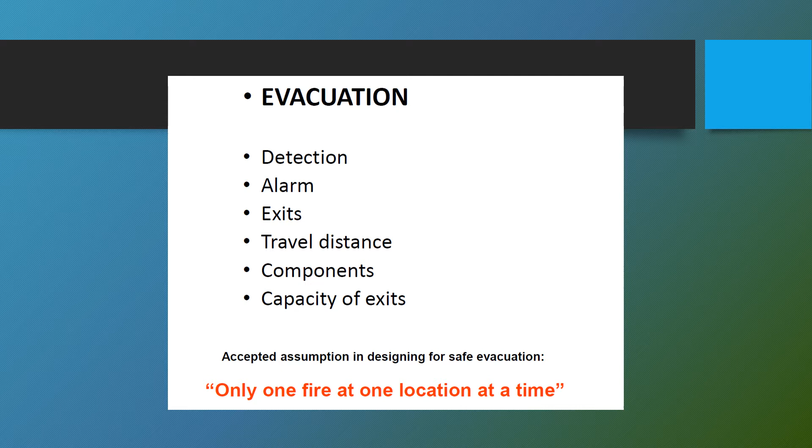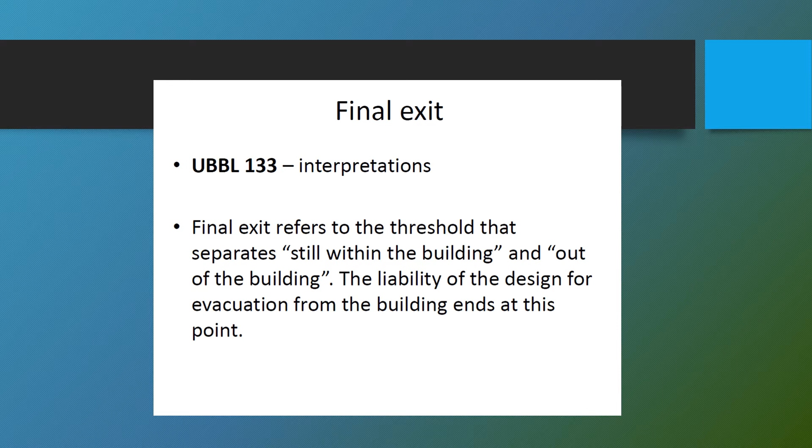About the final exit, according to UBBL 133 interpretation, final exit refers to the threshold that separates still within the building and out of the building. The liability of the design for the evacuation from the building ends at this point.

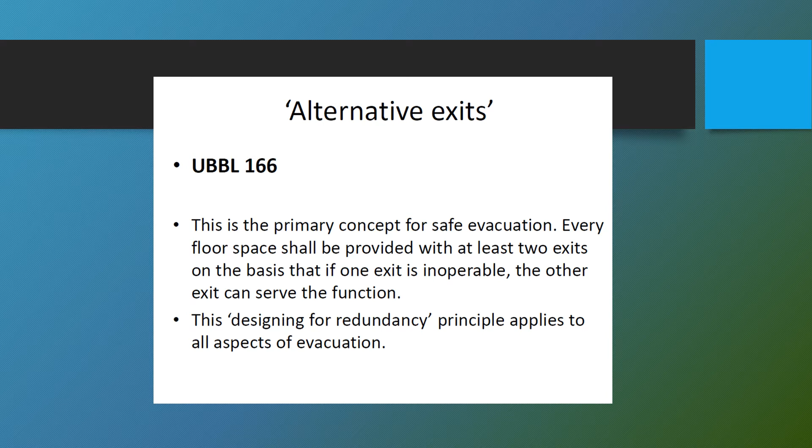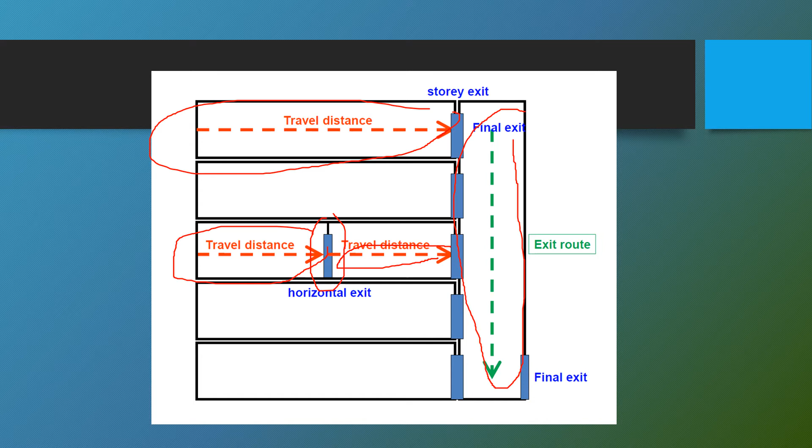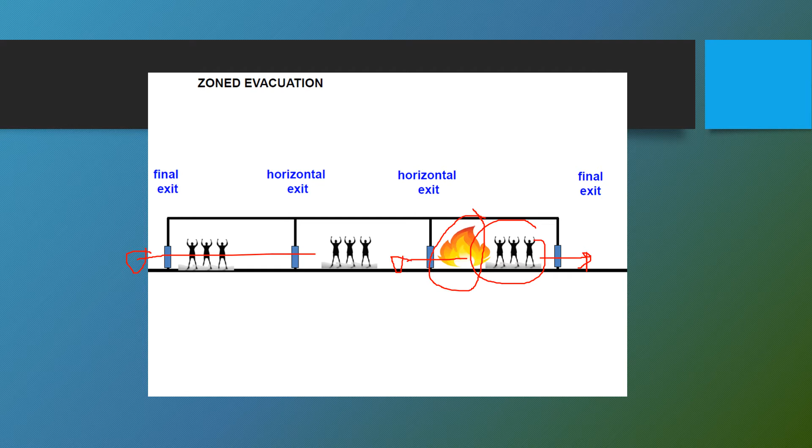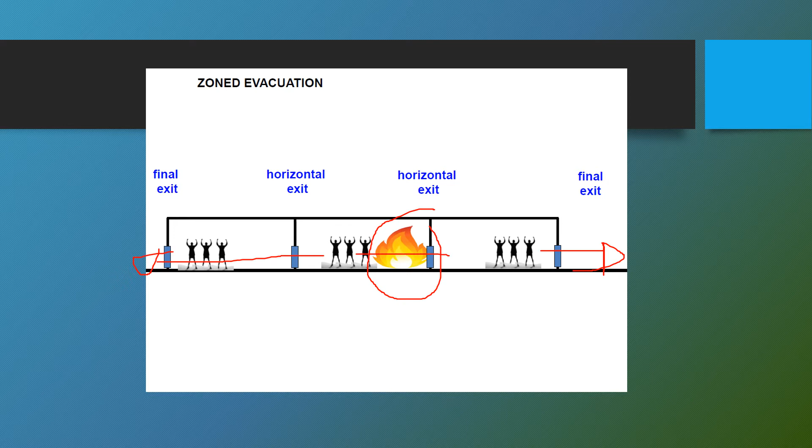Evacuation lift, UBBL 2016 34A. Any building shall be provided with access enabling disabled persons to get into and out of the building, in compliance with Malaysian Standard MS 1183 and MS 1184. This is about the disabled person. Malaysian Standard 1184:2015.

Clause 156: all new building lifts should comply with the statutory requirement on fire requirement of evacuation. That is the mandatory requirement. And then Malaysian Standard 1183:2015 Annex G is the recommendation for the refuge and evacuation lift, here.

Evacuation lift is a designated evacuation lift. The designated evacuation lift shall be within the protected shaft, shall be a component within the protected exit route. It must be there. Shall be able to be switched to evacuation mode by an authorized person at the firefighting access level. Preferably for everyday use by lift, and the physical and functional requirement is similar to a fireman's lift. Must be roughly the same as a fireman's lift.

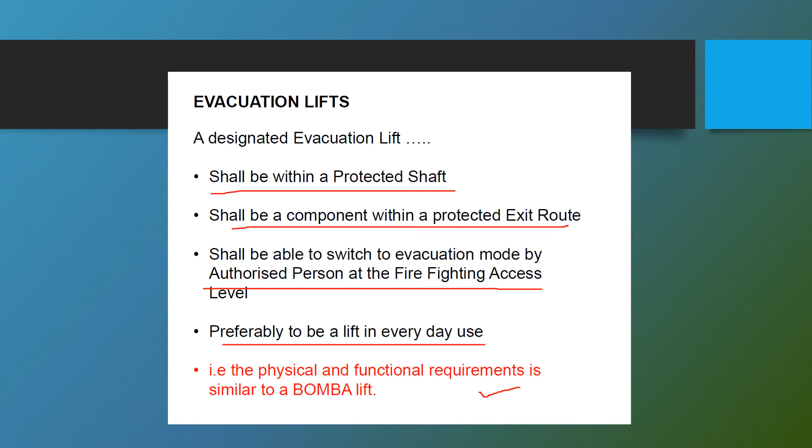Okay, so the travel distance. Let's go through the travel distance. What is called travel distance refers to UBBL clause 167 and 165, Seventh Schedule. It is about the dead end.

There's dead end, there's direct distance, there's open plan. What is called dead end is the initial travel distance before the point where alternative paths become available. And then direct distance is about stipulating that travel distance must be measured along the actual path of travel. And for the open plan, where the actual path of travel cannot be determined, the direct distance can be measured as a straight line to the exits.

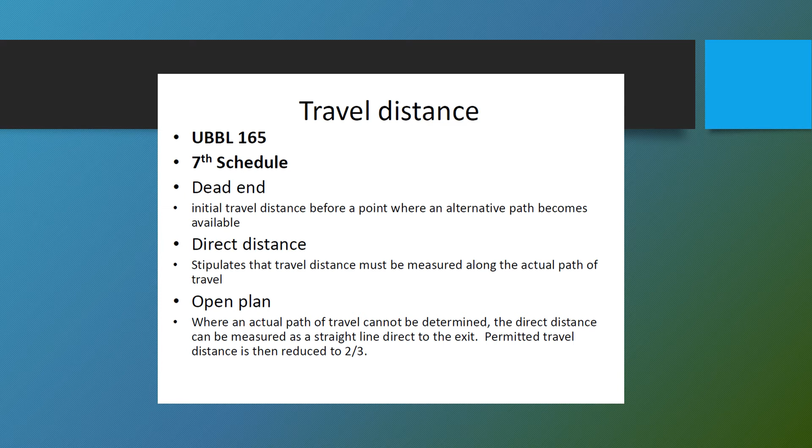Permitted travel distance is then reduced to 2 over 3. Clause 165: measurement of travel distance to the exits.

And in the case of individual subject occupancy not more than 6 persons, travel distance shall be measured from the door access of the room. Seen here, the travel distance from any point in the room to the room door does not exceed 15 meters.

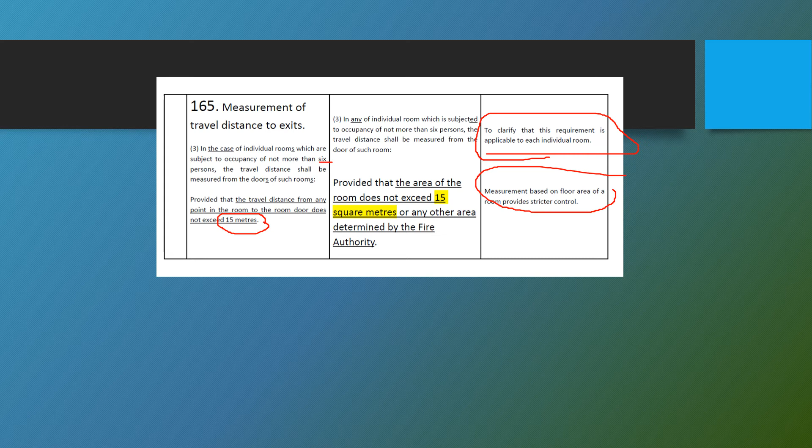Same provision applies. To clarify, the requirement is applicable to each individual room, measurement based on the floor area of the room provides stricter control. So here's an example like this.

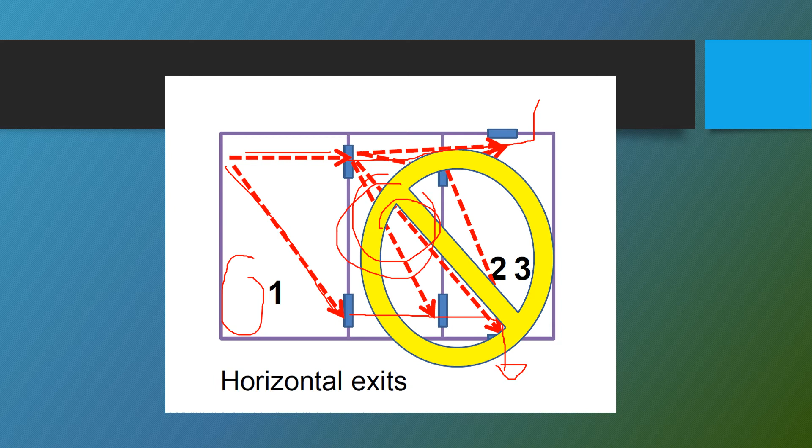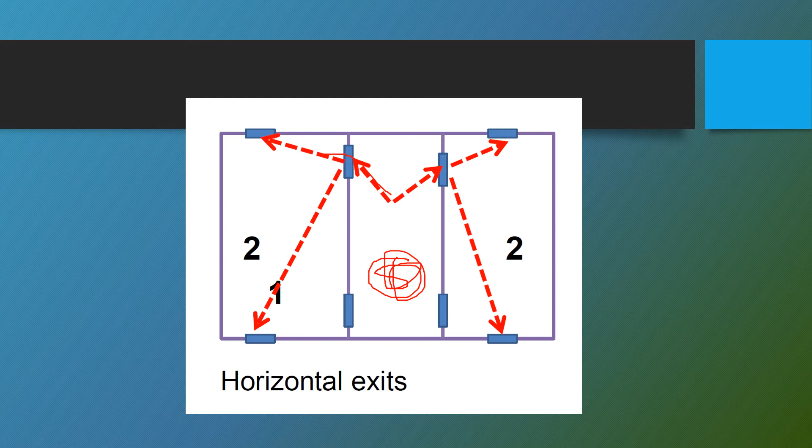So let's go through the exit route components: exit door, exit discharge, protected corridor, protected staircase, balcony approach, single staircase.

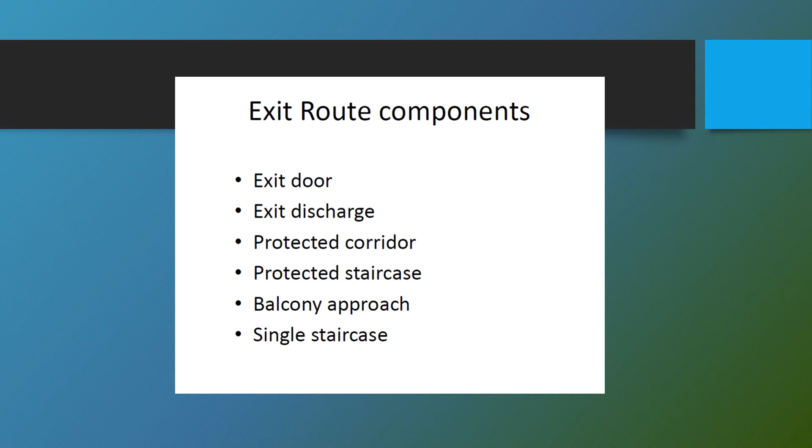Exit door, exit discharge. Refer to UBBL 173, 186, 193, 133 interpretation about doors. Refer to the physical door installed at the exit and all functional components - lock set, latches, hinges, and closers. Discharge refers to the doorway or threshold of the exit.

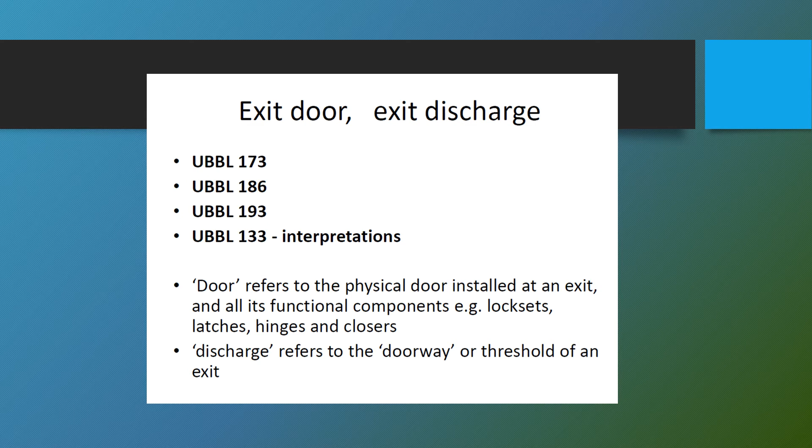Exit door and exit discharge. Not all fire rated doors are exit doors. Not all exit doors need to be fire doors. Not all doors need to be exit doors. Not all doors can be exit doors.

To qualify, an exit door must always be able to be opened without undue effort at all times. Exit discharge must always allow the passage of people at all times. Exit in this context means story exit, horizontal exit and final exit - that's what exit means.

Alright, so protected corridor and protected staircase. UBBL 133 interpretation, UBBL 157, 189, 190, 191. What is expressed is the interpretation from the UBBL that all components forming the exit routes shall be protected construction. Using the same interpretation, protected shall mean enclosed, separated, isolated from the untenable exposure of the fire.

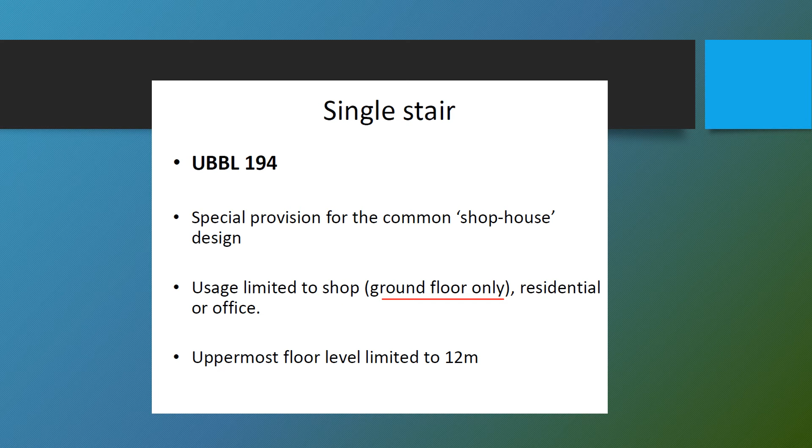Right, so UBBL 194, single stair is a special provision for the common shop-house. Shop house design usage limited to shop ground floor only, residential or office. Uppermost floor level limited to 12 meters.

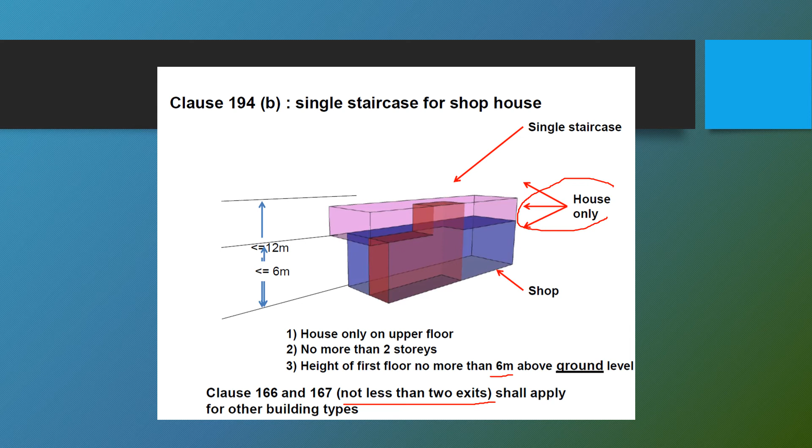Refer to clause 166, 167, not less than 2 exits shall apply for other building types. Satu cukup staircase untuk rumah lah, ataupun shop. Okay, capacity of the exit.

UBBL 7 schedule, UBBL 175, 176, 178, it is about occupant loads, exit width, application of horizontal exit. Exit width ni dia punya berapa kelebarannya, occupant load yang sesuai.